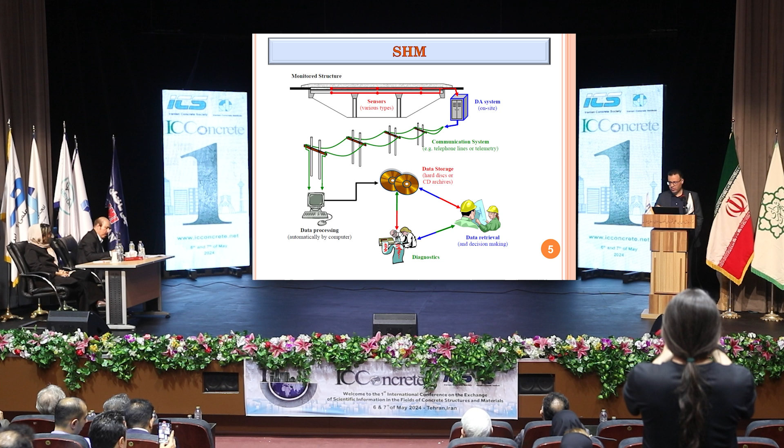As you know, structural health monitoring: over time, most concrete structures deteriorate and get damaged due to environmental and external loads. In order to identify defects that may eventually threaten the health of a structure or lead to its failure, the condition and health of a structure should be monitored over time. The term structural health monitoring refers to the process of identifying and diagnosing damage in engineering structures.

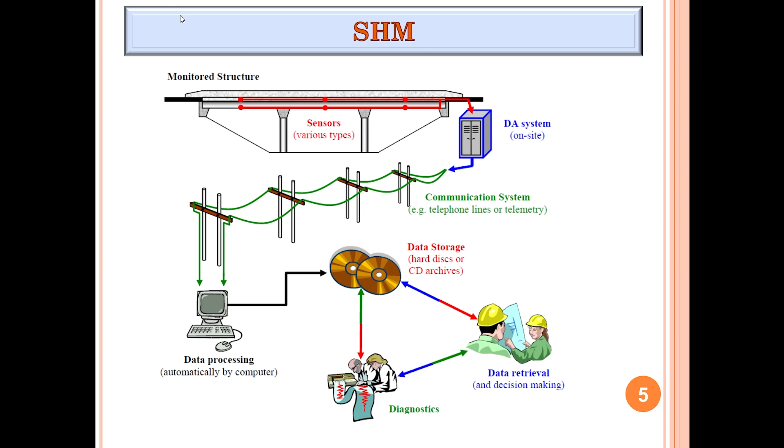This is the pavement structural health monitoring. Currently, the methods of assessing damage to different types of pavement include the following steps.

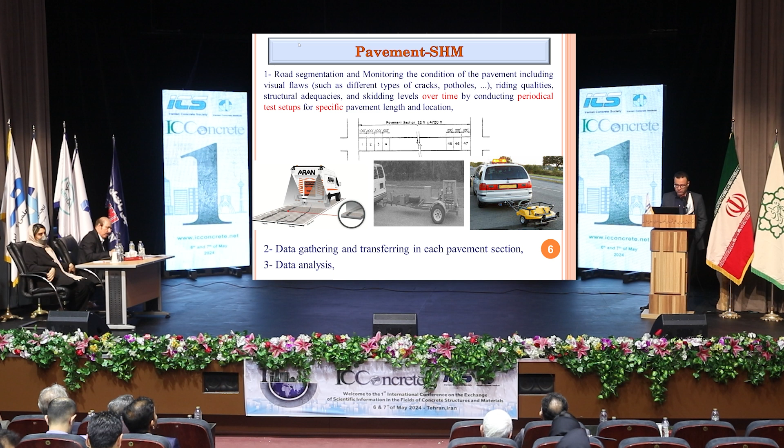These data are gathered over time by conducting periodical test setups for a specific pavement length and location. Number two, data gathering and transferring for each pavement section. Number three, data analysis.

Number four, in structural health monitoring of pavement: determining the current state of pavement condition based on analyzing and processing of extracted characteristics. For example, PCI, Pavement Condition Index, is one index that shows us the condition of deterioration in the pavement. The rate is from 0 to 100; 100 means we didn't see any defects, and when we go toward 0 it means the condition of the pavement is worse and worse.

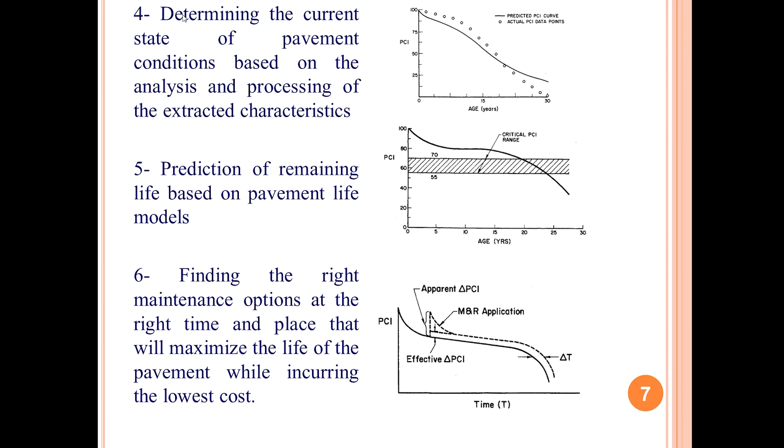So when we gather the data from the pavement and calibrate a model, number five, we start prediction of remaining life based on pavement life models. When we define some threshold, for example 70 or 55, and we reach this threshold, we decide number six: finding the right maintenance option at the right time and place that will maximize the life of the pavement while incurring the lowest cost. This means we search for the proper maintenance action.

Current method challenges: our previous mentioned pavement condition evaluation methods are periodic. That nature of discrete measurement will generate some errors, such as device error, different operator performance, differences in pavement condition, and so on, and also approximate location of the test in different time intervals, causing error in the data collection process.

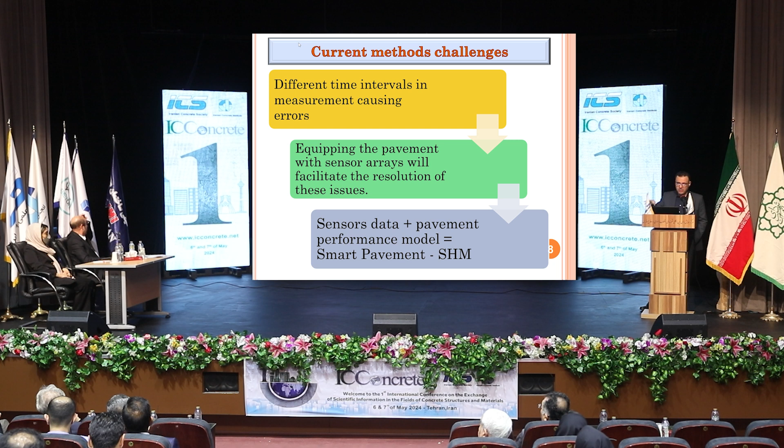So what is the solution? The solution is changing this type of data gathering by converting the pavement to a sensor, meaning we change the material of the pavement into the sensor. It's not specific to pavement; you can change the material of any structure to a sensor. So we change the pavement to the sensor, gathering the data and using this data for performance modeling, and structural health monitoring for pavement is the start.

Okay, there are a lot of sensors for use in structural health monitoring, but which one is better? Which one is cheap? Which one is durable? Which one is sensitive? We must search about this if we want to operate and bring some technology to real field applications.

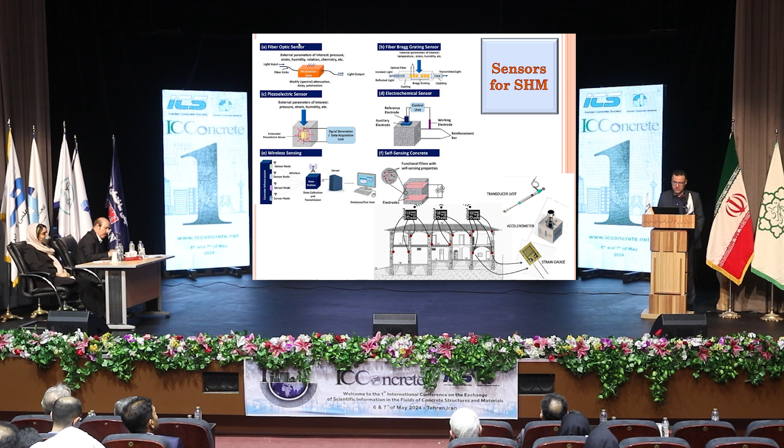What is the self-sensing sensor? The concrete, by adding a functional filler, a conductive filler, to the concrete or asphalt or masonry material, changes it into a smart material. This means by applying force, humidity, or temperature to this material, the response of that material, which is electrical resistance, changes.

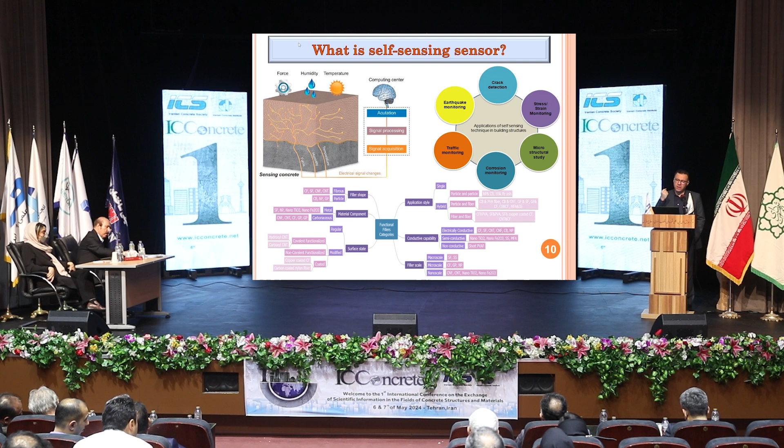This type of sensor can work for us for crack detection, stress-strain monitoring, and microstructure study. One of my students is now working on this subject, correlating mechanical fracture mechanics models to the output of the sensors, the electrical output of the sensor.

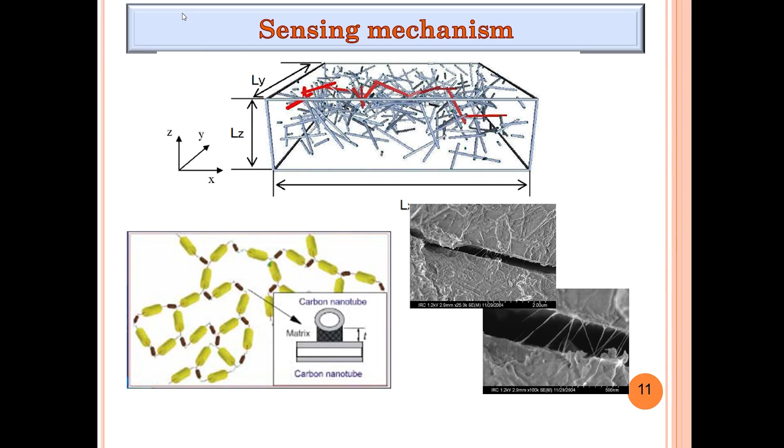Another application is traffic monitoring, and so on. So maybe you have a question: how does this type of sensor work? This is your answer: the sensing mechanism. What is the sensing mechanism?

When you add some conductive filler to this media, the concrete media, a conductive path is created. The conductive path helps the electricity current move through the area of the concrete.

When you push the concrete, the distance between these conductive fillers decreases, and the electrons can easily jump from this conductive filler to that conductive filler. So we have a correlation between pressure and electrical resistance change. This is the base of the sensor.

Also, in damage detection, assume there is a lot of conductive filler here in this picture. There are a lot of conductive paths in this filler. When you cut some of this conductive path, the resistivity changes. So the crack can change the resistivity.

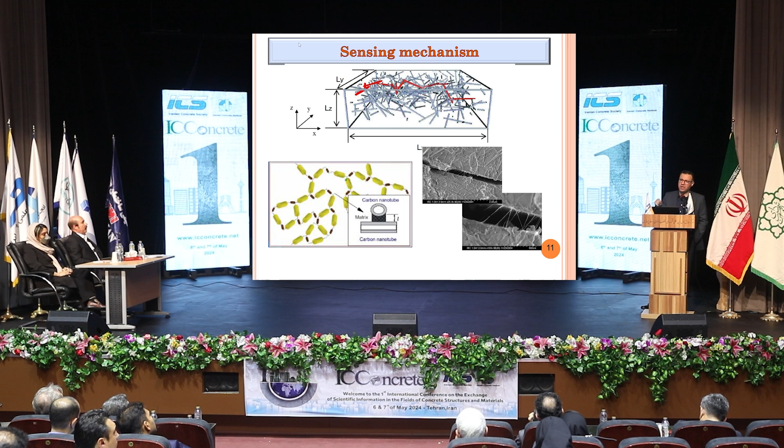Okay, literature review. This is for maybe your question: is this a novel idea, or is it already working in the field? You can find out it already works in real form.

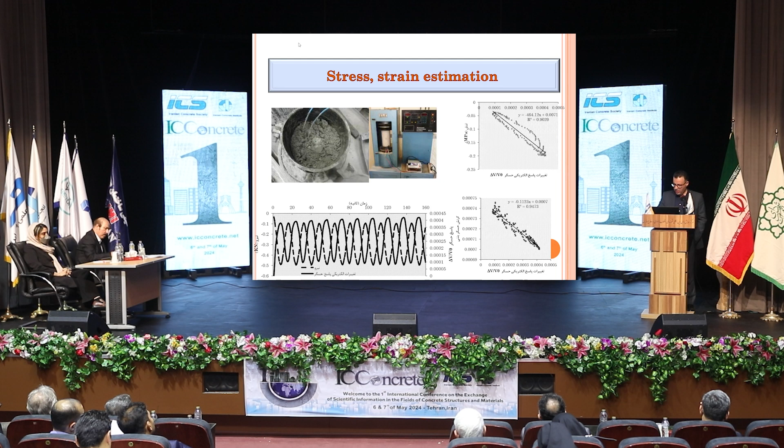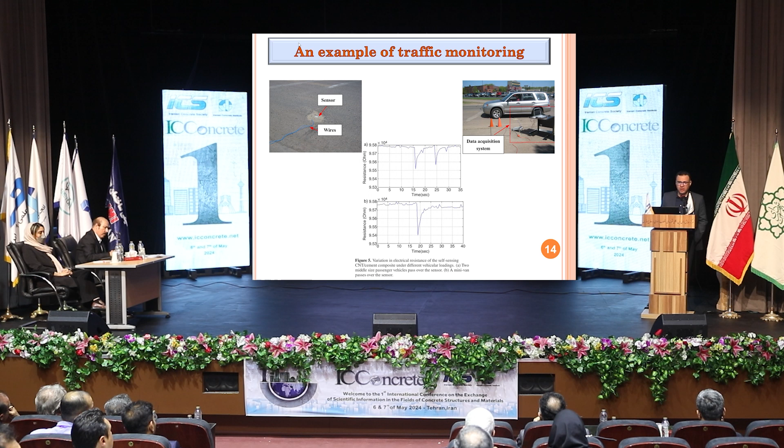An example of traffic monitoring: Han et al. embedded a concrete sensor in a pavement and measured the variation in electrical resistance of a self-sensing CNT cement composite under different vehicular loading. Figure A, above, shows two middle-sized vehicles passing over the sensor. Figure B, at the bottom, shows a minivan passing over the sensor. So this sensor can detect the wheel passing.

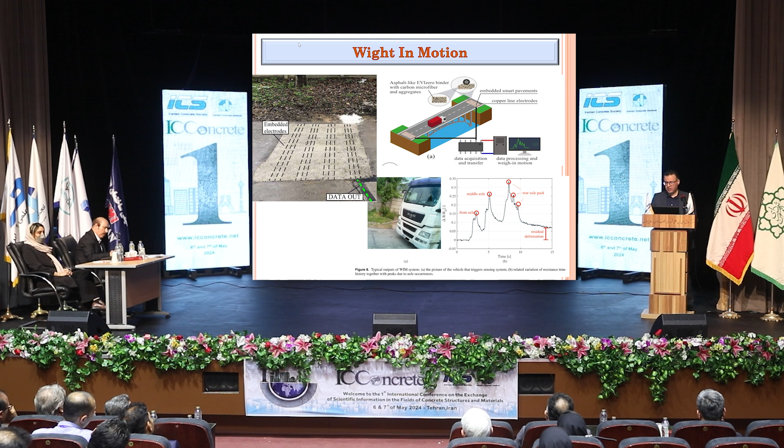Another example, weigh-in-motion: Ubertini developed a self-sensing sensor slab in a pavement for a field study before and after a bridge. They were able to weigh the traffic loads in motion by the weight of each axle, and used the gathered data to monitor the health of the bridge structure.

In steel structure health monitoring, Han et al. successfully captured a structure's behavior under variable loads by incorporating a concrete sensor with self-sensing capabilities into a building model with a steel structure. The comparison with conventional electromechanical strain gauge and force gauge sensors demonstrated the superior accuracy of concrete sensors.

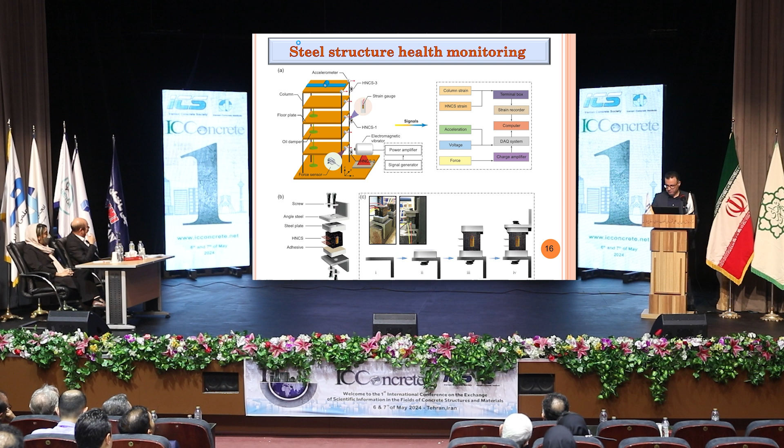Smart bricks for masonry structural health monitoring: Ubertini et al. successfully developed smart bricks technology with self-sensing capability by incorporating conductive filler into clay material, changing it into smart bricks. These bricks were integrated into a traditional structure to create a sensor network. Through monitoring of sensor data, the researchers could accurately identify the formation and propagation of cracks in a historic building in Perugia, Italy.

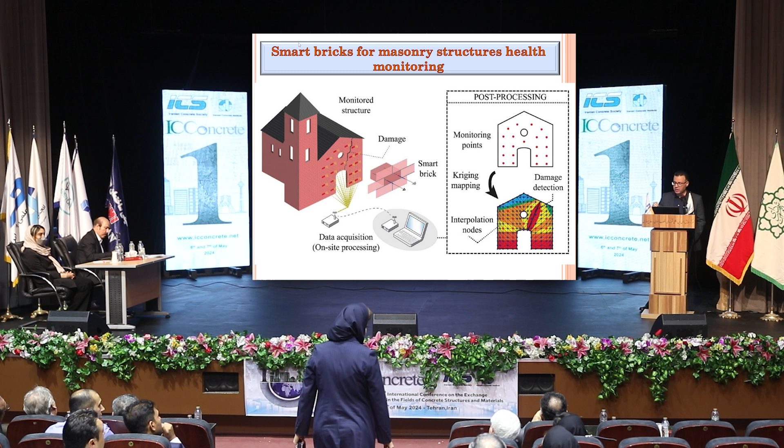Damage detection based on skin sensing. Another method for damage detection involves utilizing the electrical impedance tomography, EIT, technique. This technique entails positioning a series of electrodes on a surface that possesses self-sensing capabilities. Each electrode takes turns transmitting an electrical pulse, which is then picked up by the remaining electrodes. This sequence is carried out systematically for every electrode.

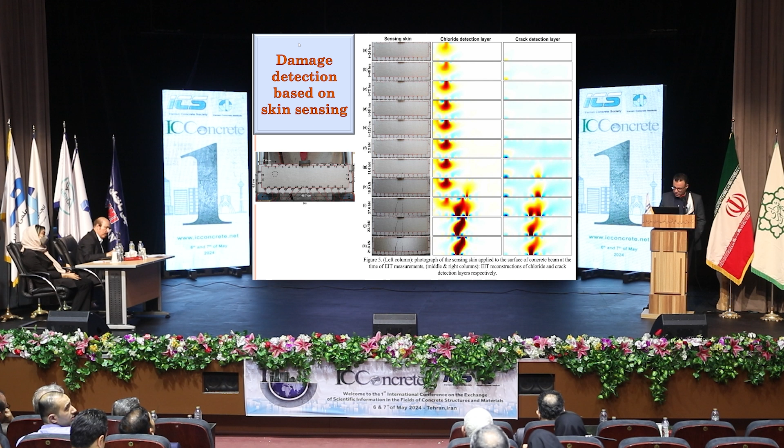Another work, damage detection based on ERT, was applied by Sumit Gupta in California, I think. They try to validate large-scale application of self-sensing concrete in airport runway pavement, and to use electrical resistance tomography (ERT) for characterization, especially distributed damage during accelerated pavement testing.

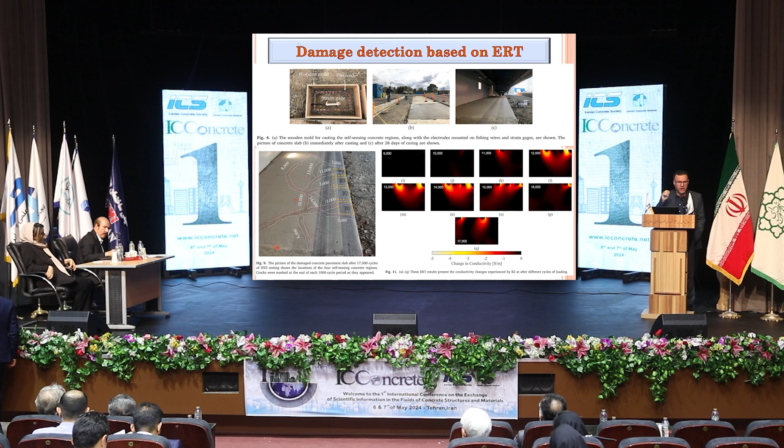As you can see in the above picture A, these are the sensors. They cast some sensors in a field test and move a heavy load in accelerated testing facilities, and as a result they can find out that at different levels of passing the wheels, from 9,000 up to 16,000 or to 37,000, a crack occurs and the crack propagates. And this type of sensor can find the crack and localize it.

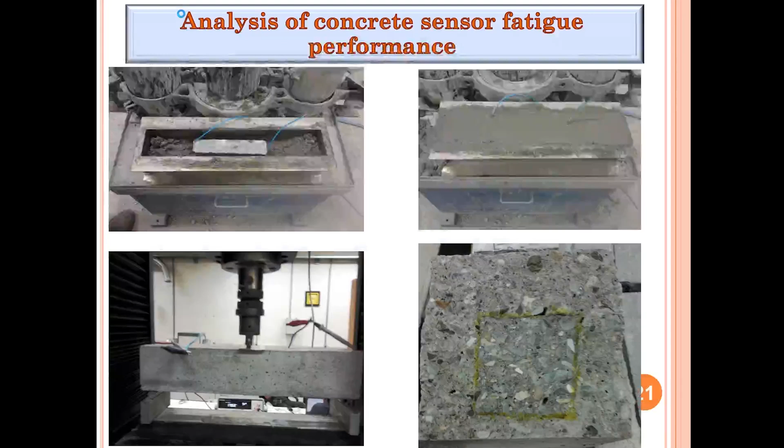Okay, structural health monitoring based on self-sensing ability. The region of pavement failures.

You have 2 minutes left. 2 minutes, okay.

A summary. If you want to generate structural health monitoring, you should generate a model, use the electrical response of the sensor, and predict the remaining life of the pavement. When you know the remaining life of the pavement, you can manage a proper maintenance action.

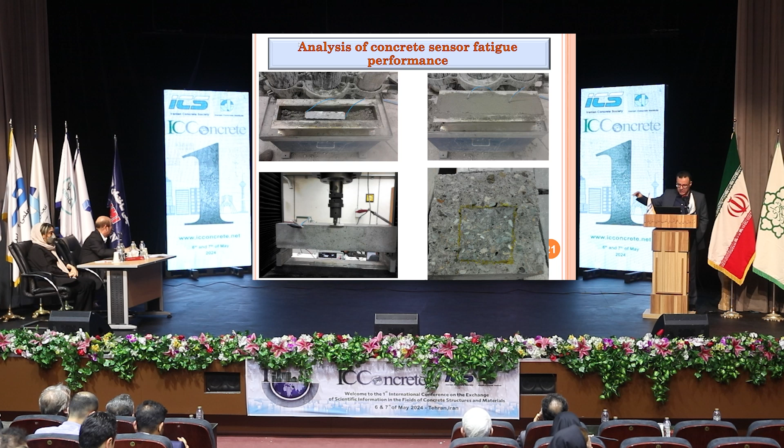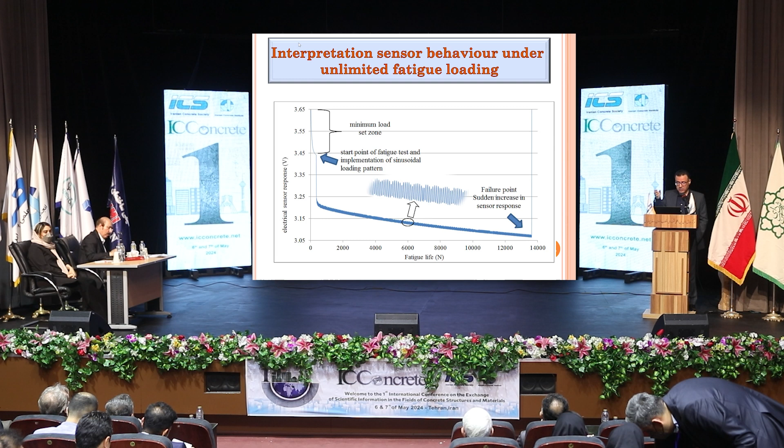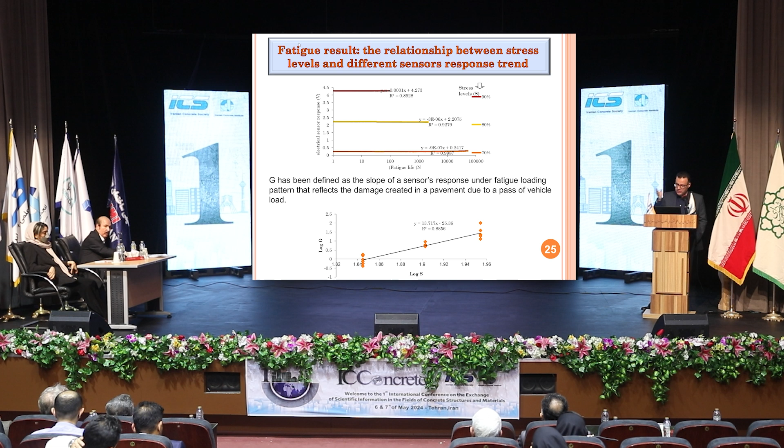Okay, in this research study, we analyze the concrete sensor fatigue performance. We put a sensor in a beam and we run a fatigue test. We generate an S-N curve. Also, we interpret the electrical sensor output under fatigue loading. We find out the slope of the response of the sensor changes over its life. And we define a G factor, which is damage per cycle, and a G-N curve.

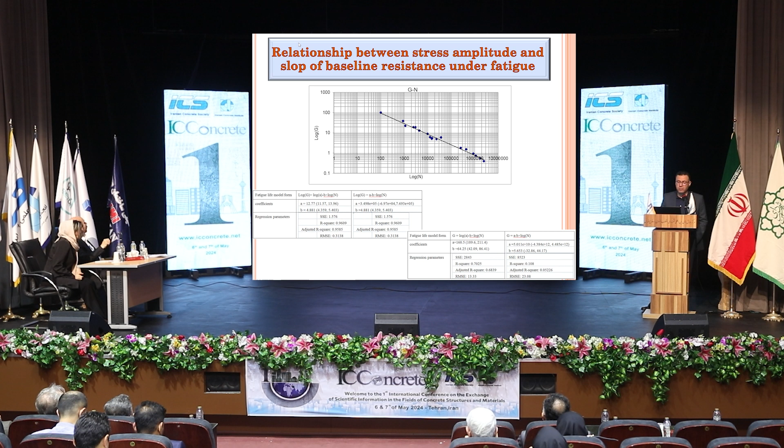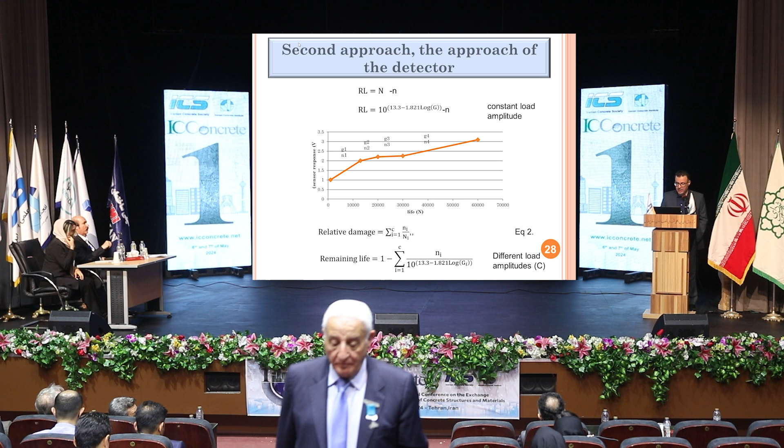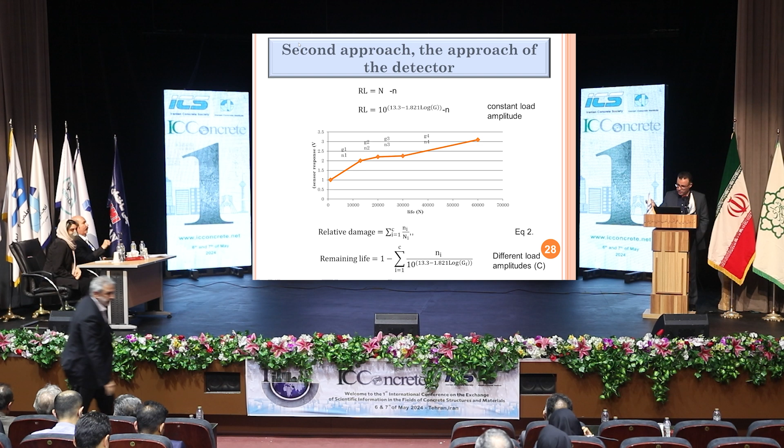We rewrite this as a new type of fatigue model, which is log G log N instead of S log N. And we use this type of fatigue model to predict the remaining life of the pavement by substituting that model in the equation in the first line. We have remaining life, and we extend the use of this model to different loading conditions and loading amplitudes, and finally we generate the remaining life of the pavement based on the electrical resistance of the sensor in the last equation.